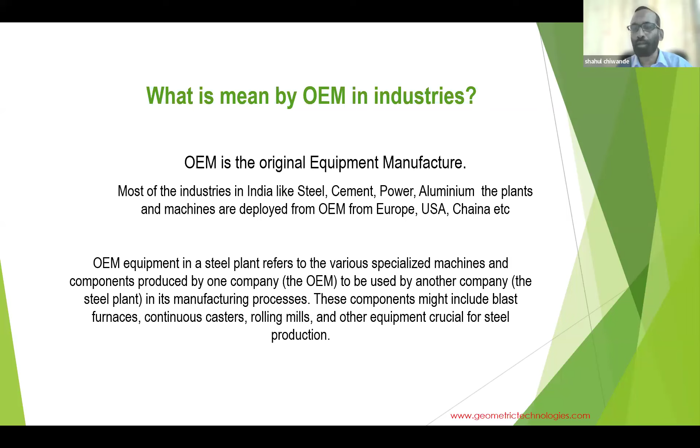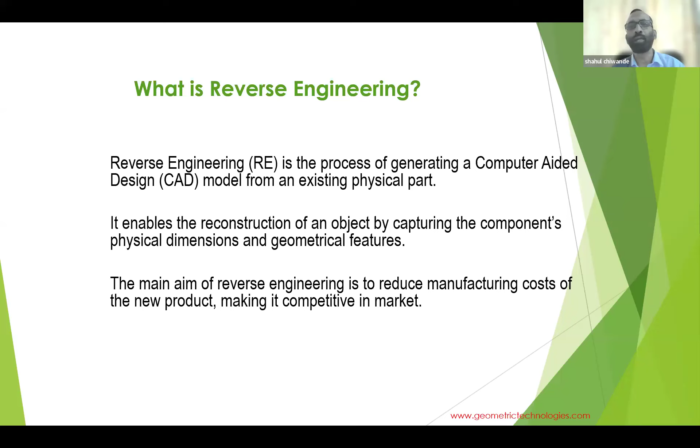OEM, okay. So what is reverse engineering? Reverse engineering is nothing but the process of generating computer-aided design from spare parts, whose documentation we don't have, from existing physical parts. It also enables reconstruction of the object by capturing the component's physical dimensions and geometrical features. The main aim of reverse engineering is to reduce the manufacturing cost of the new product, making it competitive in the market. This is the basic term of reverse engineering.

Now, the need for reverse engineering - why do we need it? As I told earlier, most industries in India use machines and lines to manufacture their products from overseas. So in manufacturing of components after discontinuation of existing product lines, we've seen that in many cases the manufacturing processes are lines which have existed for more than 40 years in India, and they are still running. So there are a lot of spares and machines involved in the line to manufacture, say, steel.

In the case of maintenance, when we find that some components wear out and we need to arrange those components for running the line, we find that when the product line is discontinued overseas, there is a scarcity of finding the right products, the right spares. In that case, reverse engineering plays a key role in developing those spares, so that the product gets developed in India.

Sometimes we redesign the existing design which lacks adequate product data and documentation. We find that when we modernize some lines in India, we have to redesign existing products, and for that we have to take a reference - and to take a reference, we have to reverse engineer it.

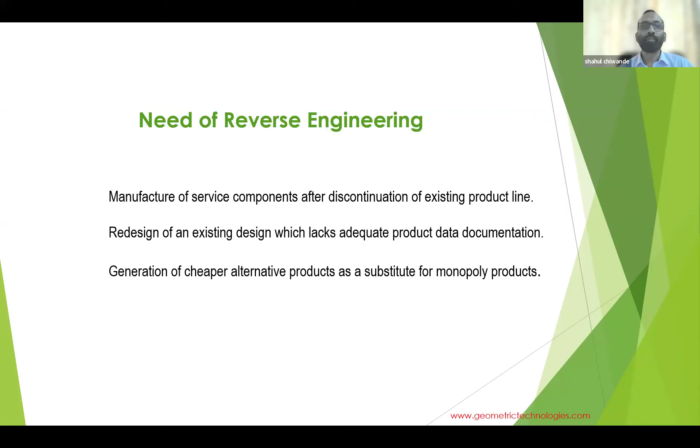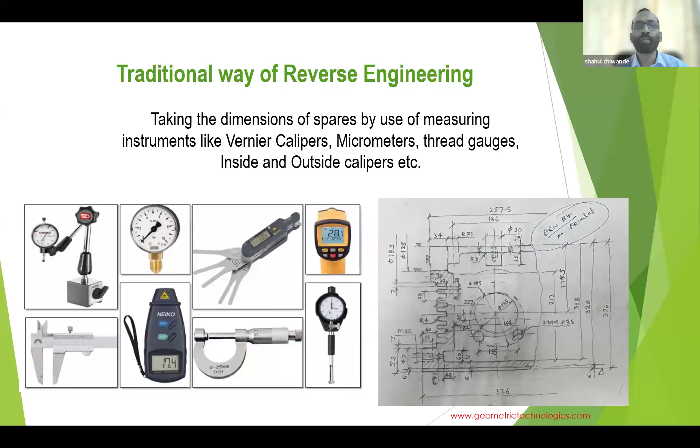See another example - this is one of the casings of a gearbox. The draftsman takes measurements with the help of verniers, screw gauges, and similar measuring instruments, and then from his sketches he has to proceed to draft the final product.

Now things have changed. In recent trends, CMM machines and 3D scanners are used. These may be handy, fixed, or arm type scanners. There are a lot of 3D scanners available in India - some are handy scanners, some are fixed bed scanners, and some are arm scanners which can move with 7 axis. It depends, everyone has pros and cons.

In recent trends, we have material testing equipment - maybe destructive techniques, and latest non-destructive techniques are also introduced in India, like laser gun, so we can test the material also. Then 3D modeling with high-end software using the 3D scan data - if required, we find the component is critical and we have to test it in the computer. We have CFD and CAE software, and if required, we can do that analysis also.

So I will show you one or two videos of 3D scanning.

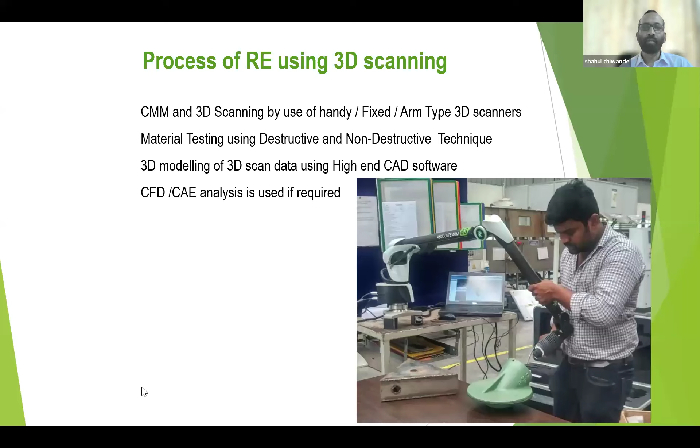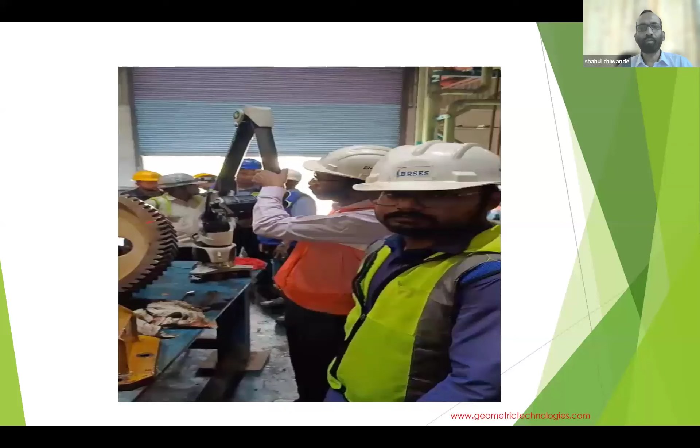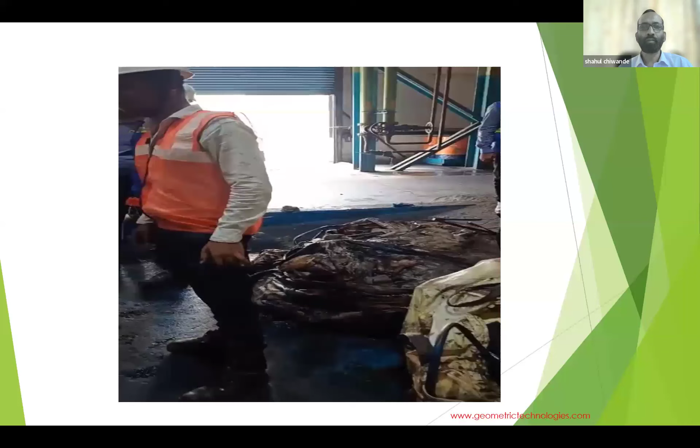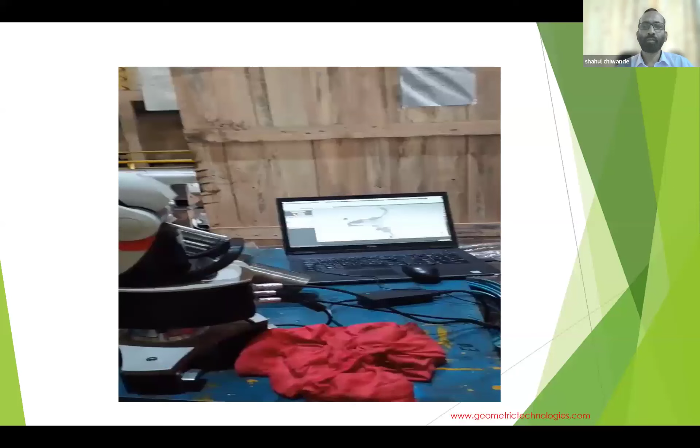So this is the gear and shaft arrangement. We are scanning it for Hindalco. This is the arm type scanner of Hexagon make.

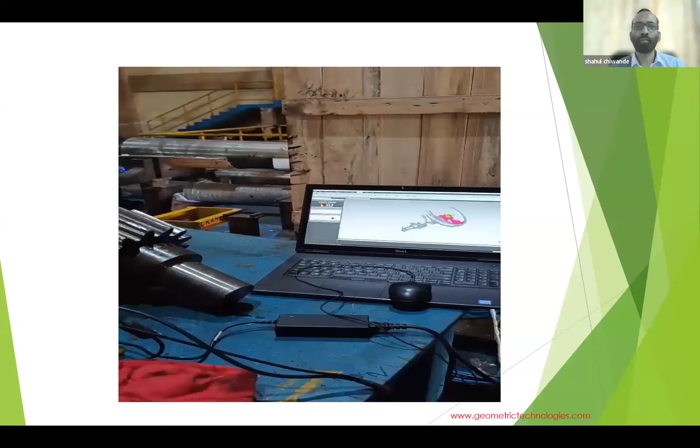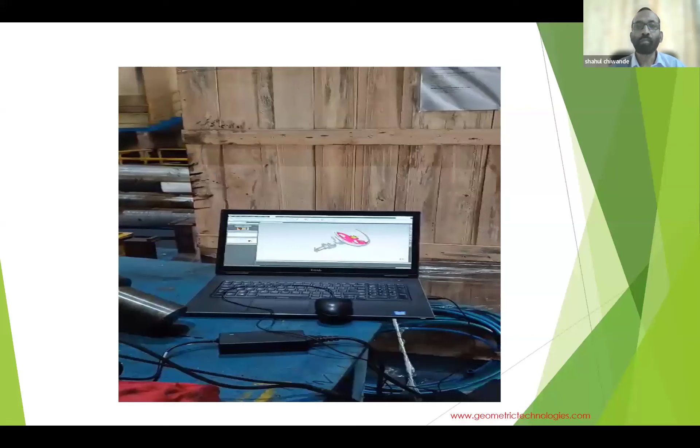One more video I will show you.

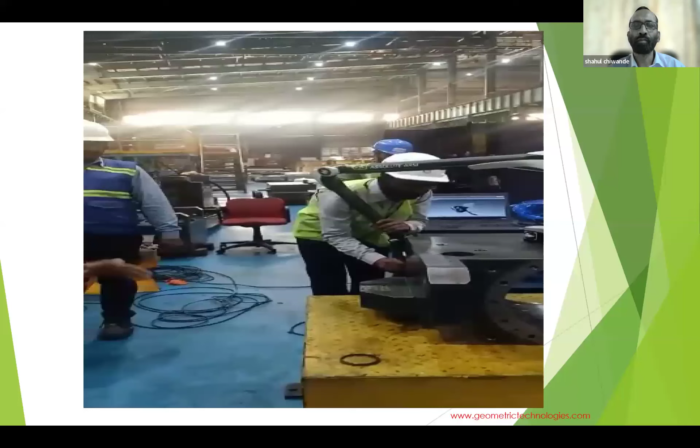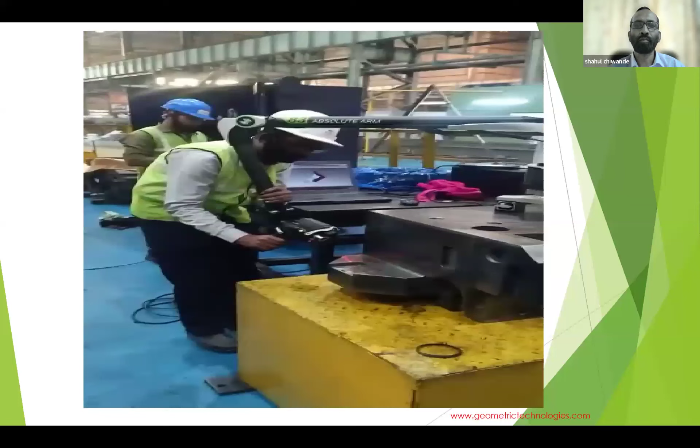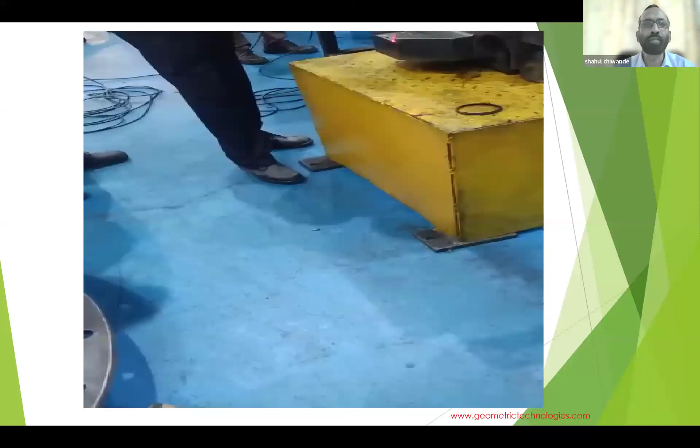When we go for reverse engineering, meaning development of drawings or 3D modeling, we have to extract the dimensions from the point cloud data. It's not directly facilitated, so from point cloud data we have to make an STL image. From the STL image, we can import it into any CAD software like SolidWorks, CATIA, AutoCAD, NX, and from that STL image we can recreate the CAD model. From that CAD model, we go for drafting, because point cloud and STL don't permit extracting views directly. So this is the general process of reverse engineering using 3D scanning.

So we can compare reverse engineering using manual traditional methods versus 3D scanning. If anybody takes a sketch, you might know that taking a sketch or handling measuring instruments itself gives varying readings. A person with more experience can accurately take the dimensions, but a less experienced person may miss some dimensions or make errors. If the dimensions get wrong or we miss major dimensions, it becomes very difficult to make the proper manufacturing drawing, whereas with latest 3D scanning, your physical part is almost at our computer.

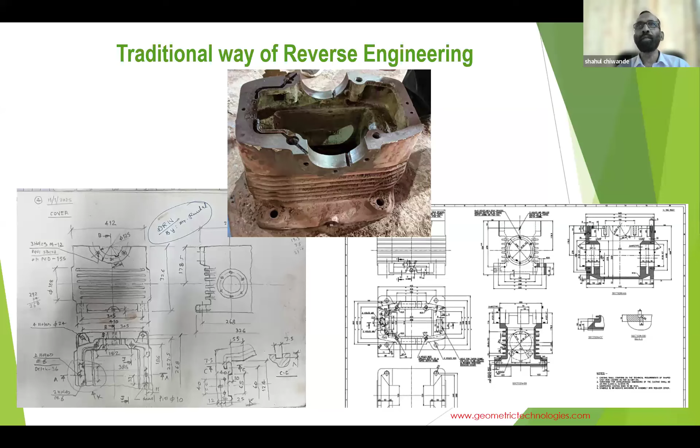In industries, production lines are up and running, and whenever they have maintenance schedules, they can take up parts for reverse engineering or maintenance purposes. In a very short duration of time, we have to take manual measurements or do 3D scanning. But with manual measurement, if you miss some dimensions, we have to wait for another maintenance schedule. With 3D scanning, once we have the scan data, we need not worry about missing dimensions - at any time we can take any dimensions from the scan data. So that is the advantage of 3D scanning.

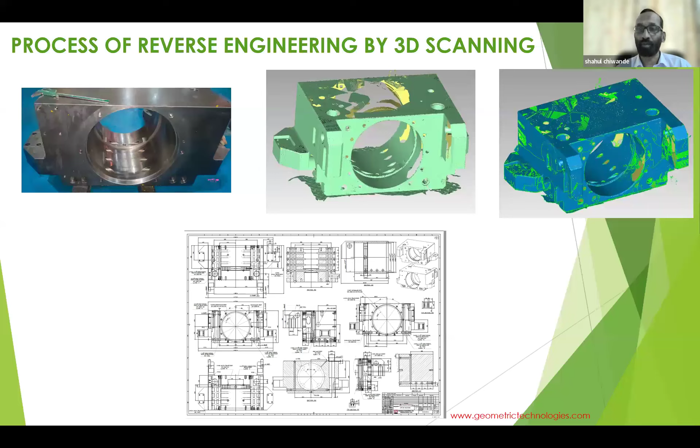Apart from that, things move faster. Once we have 3D scan data, we can make an accurate CAD model, a 3D model, and then we can easily place the views. But with manual measurements and low-end software like MS software, it's very difficult to draw the actual projections - there might be some error. So this is the comparison between taking measurements manually versus with 3D scanning.

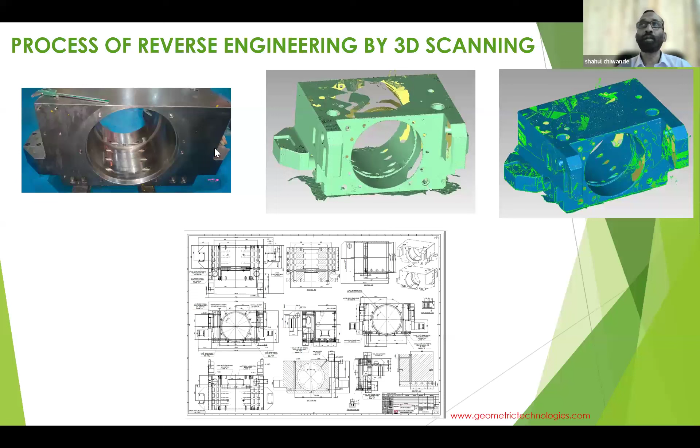So I would like to share one of the case studies. We developed a recent project with Bhilai Steel Plant - it is a cross travel gearbox. We designed it for reverse engineering for the Bhilai Steel Plant. So stepwise, I will explain it to you.

The first stage is detailed discussion on all the spare parts and noting the bearing details of the gearbox. Reverse engineering is a very simple process, but at the same time it requires experience. People without experience may have their reverse engineering product fail. So at every stage of reverse engineering, we have to apply our experience.

Before going for scanning and other steps, we have to put detailed discussion about these products - this is the gearbox - and discuss the functionality, which we put on record. Then we note down all the bearing numbers. So this is the first stage of reverse engineering. This is the actual gearbox we developed.

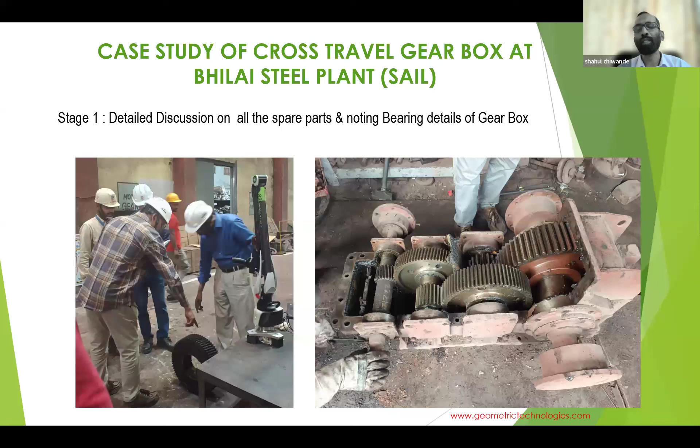Then the second stage is 3D scanning of all the spare parts of the gearbox. This is a 4-stage gearbox which we have scanned. We worked on more than 30 parts scanned in just 8 hours.

While scanning, we also need experience. If anybody doesn't have experience in scanning or handling the machines, the data captured might be disturbed, because proper handling of the machine is a very crucial part of reverse engineering.

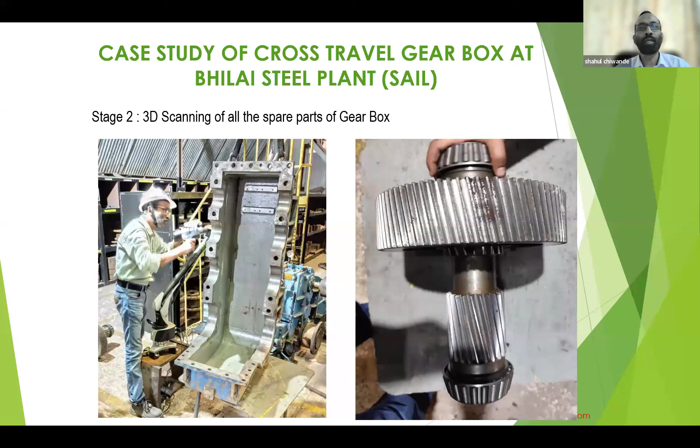The third part is processing the 3D scan data. The data we capture by the scanner will be in the form of point cloud. The point cloud has every information in it, but we can't extract dimensions from it directly.

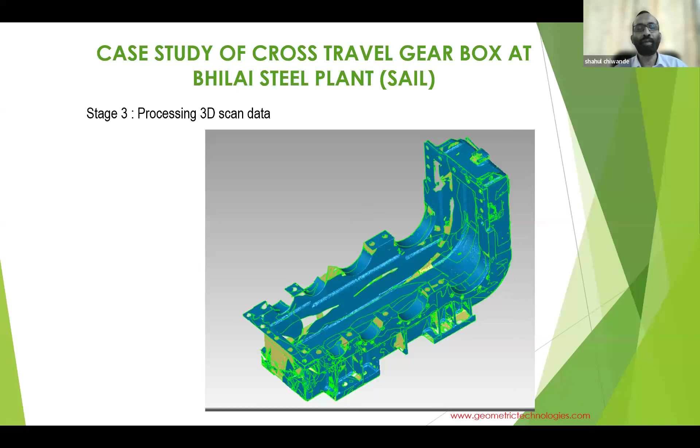So from point cloud data, we have to process it into STL files. This is the STL file process. Then from the STL file, we use Creo to create a proper CAD model.

Experience is also involved in this, because we have to never miss any planes, and the modeling should be in line with the dimensions from the scan data we captured. Any deviation from the scan data will lead to failure of the reverse engineering.

So after making every model in CAD, we have to assemble it. The next image will show you the assembly of that gearbox.

After assembling and making the CAD models, we basically don't want any loopholes in our design. Once we release the design and the product gets manufactured, it should be at par with, or in line with, the requirement the client has.

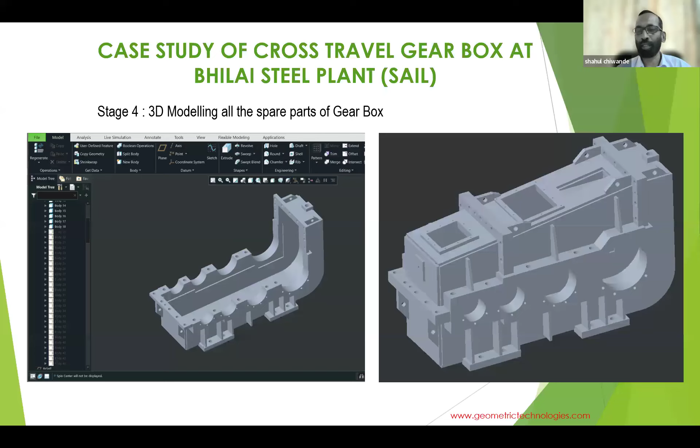Any mistakes in it lead to failure, so for a gearbox we have to make sure we also do the backend calculations.

Just like, in case of a gearbox, we take the central distance as a parameter, and then we have to make calculations for modules, teeth, and pressure angles. This sort of calculation we do so that we can be confident our modeled product is in line with industry standards.

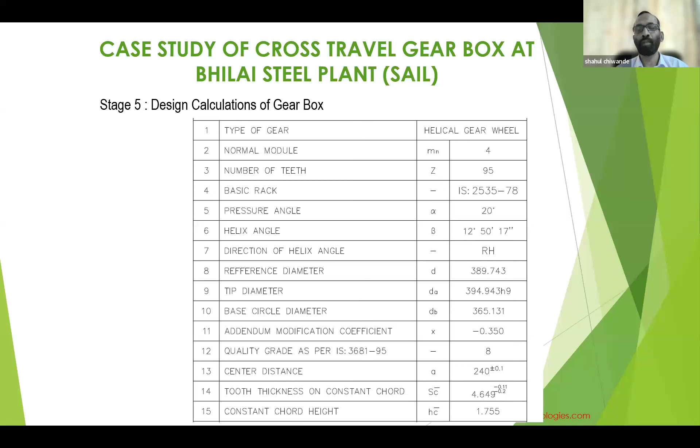After that, we go for optimization if required. Sometimes it's needed, sometimes it may not be.

In the case of this gearbox, we found that after making the 3D model and assembly, the center distance of the bearings was varying immensely, from 4 mm to 20 mm. We found that this would affect the life cycle of the gearbox in terms of spare parts and bearings.

So we have to make sure that it is in line with industry standards and industry experience. As I told you, this is a 4-stage gearbox.

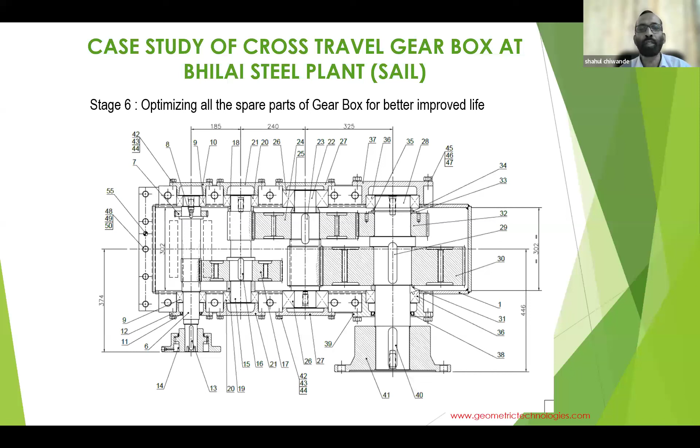For stage one, the dimension is 312. For stage two it's 310. For stage three it's 304 mm, and for stage four it's 300 mm. Based on our experience and standard practices, we make them all available at 302.

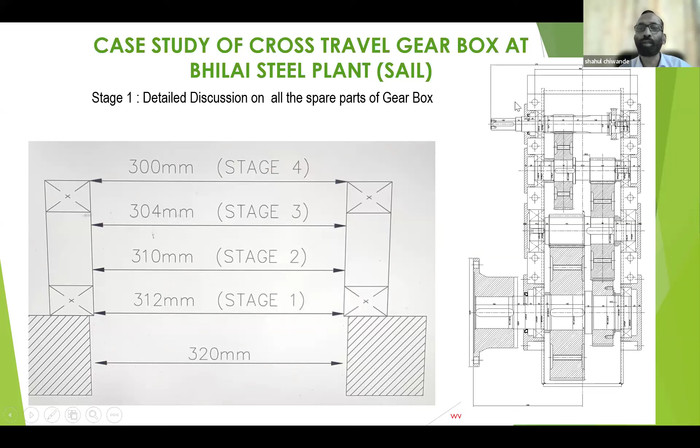That will help our client so that this works in a proper way. So after optimizing the gearbox, we go for manufacturing, releasing the manufacturing drawings.

Releasing manufacturing drawings means making sure all the tolerances and all the fits are mentioned. Apart from that, every drawing needs to go for manufacturing. So the manufacturing process will be strictly mentioned in the drawings, such as forging, tooth profiles, and all such things we have to ensure.

So that when the client goes for manufacturing the same drawings, apart from the dimensions, they should follow the manufacturing process. So this is a very small success story.

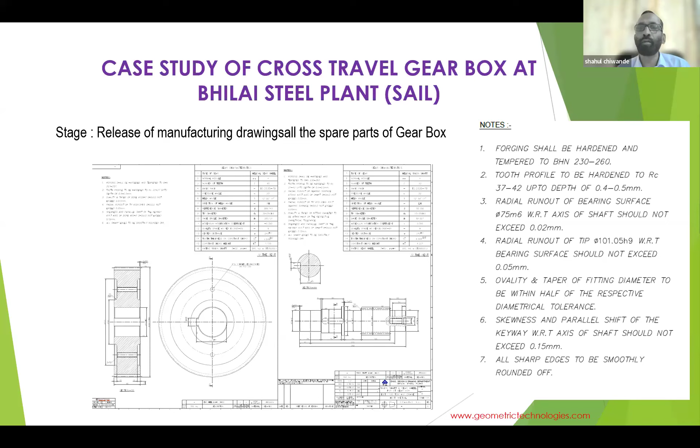In conclusion, the case studies show that apart from manual measurements and manual reverse engineering, if you go for 3D scanning, the total time for scanning is almost 6 hours for more than 30 spares. If the same case were done with manual measurement work, it might take 10 to 12 days to capture the dimensions by sketching.

This technique is recently used in every industry, because most industries, as I told you earlier, in India have machines deployed from overseas, and when we call for spare parts, it costs more. Also, the lead time for spare parts to arrive at your place is also high.

In most cases, the lines or plants running are more than 30 years old, and still running, and getting spare parts for those lines from overseas is obsolete, so it's very difficult. So in India, there is huge scope for reverse engineering.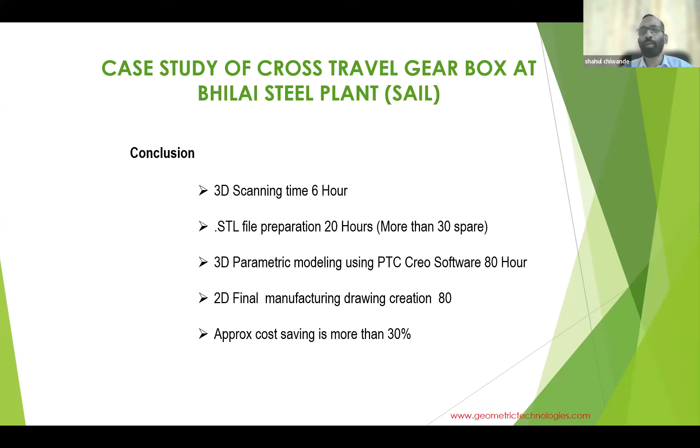Most countries are adopting reverse engineering. China is widely adopting reverse engineering and is leading all over the world.

Countries like Japan and India also utilize reverse engineering in terms of automotive. In India, most of the reverse engineering is done in the field of automotive only, and a huge scope of other industries like cement, steel, and aluminum are still lagging behind.

The challenge is reverse engineering in India. As I told, reverse engineering is the process of re-engineering or creating accurate parts. The complexity of designs in many products is highly complex, even involving intricate design and advanced materials.

Sometimes India has a lack of resources and cost issues. Reverse engineering any critical spares requires experienced resources, and it costs more. Also, the equipment and time taken will be more, and some materials may not be available, or the manufacturing process in India has some limitations.

We will find it difficult locating the proper vendors. These are the processes. Then there are technological limitations also. Intellectual property rights are also a concern, because of how we are importing machines and what our agreements are, this depends upon that. Also, as I told you earlier, high cost and high resources are also a problem.

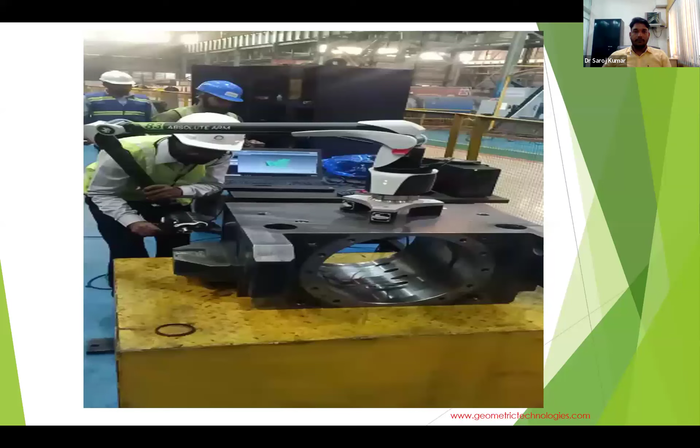Please feel free to ask me, because I am from a total industry background, so I don't have much more practice in giving lectures, so I might miss something.

This was wonderful, sir, you really shared the practical things, what is happening, what is just going on in the industry. This is a good thing, sir. Your lecture was wonderful, actually, thank you, sir. Actually, in other lectures, the theory part is there, but nobody tells about what is going on in the industries, what is really happening, what is the exact need of the industry. That was just told by you, the industry personnel who are engaged in the industry only. So this is really a fantastic lecture, a knowledge sharing thing. Thank you, I just tried my best. No, sir, it's a good thing, and I really appreciate your efforts towards presenting these things in a proper manner.